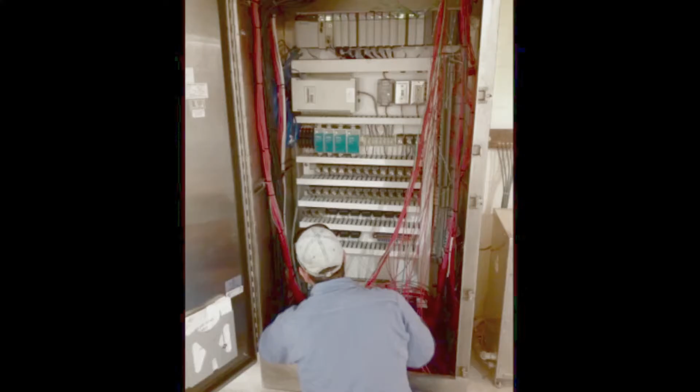It's so sandy because I bought it as a foreclosure, and it's been sitting for years with no working sprinkler system. Since I started the EPT program and began working part-time, I haven't had any time to fix it. I work for Palm Beach County Water Utilities, out by Boynton Beach Boulevard and the Turnpike. I intern as an instrumentation technician. Here I was introduced to programmable logic controllers.

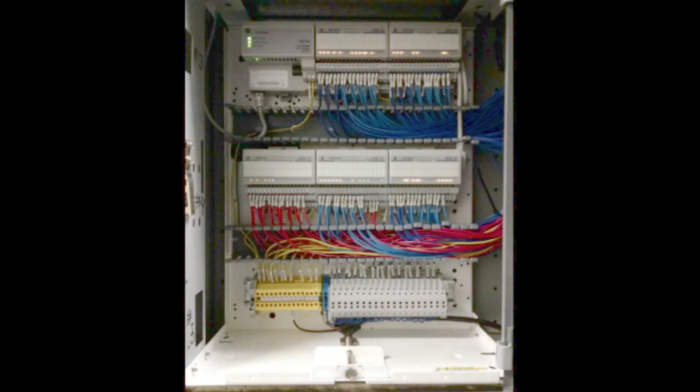They are basically industrially hardened computers that use dozens of inputs and output signals to control a final process, in our case, reclaimed water. I have had a share in many projects like wiring this I/O panel, and I have recently been tasked with completely updating this mess of a cabinet. Months and months of tedious work.

Working here is why I've decided to incorporate a PLC in my Capstone project. Wiring and programming one on my own would sharpen my skills in this field, meanwhile solving my cat problem. I would have to use the skills I learned in electric circuits, instrumentation, and programmable logic controllers. Also, I would need some knowledge about the enemy. My extensive research has taught me that cats don't like to be wet, but with what solution? Of course.

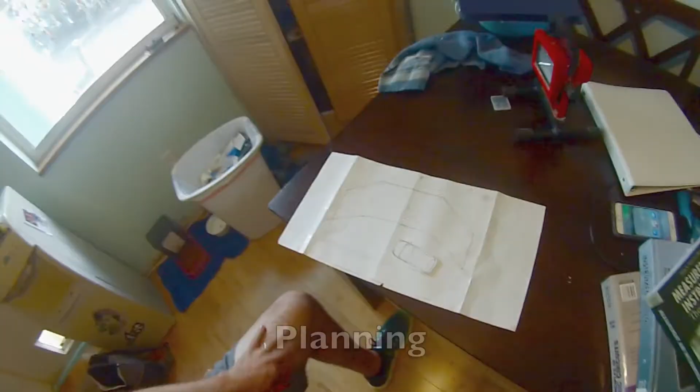It was necessary to plan carefully. I didn't want my project to conflict with any future plans of re-landscaping. At present, I have an oddly shaped piece of lawn and a crescent-shaped driveway up front. I plan on tearing up most of that driveway up front, making the lawn extend forward, but narrowing. I tested a few sprinkler types for approximate circumference at standard city water pressure, and I settled on 5 overlapping locations.

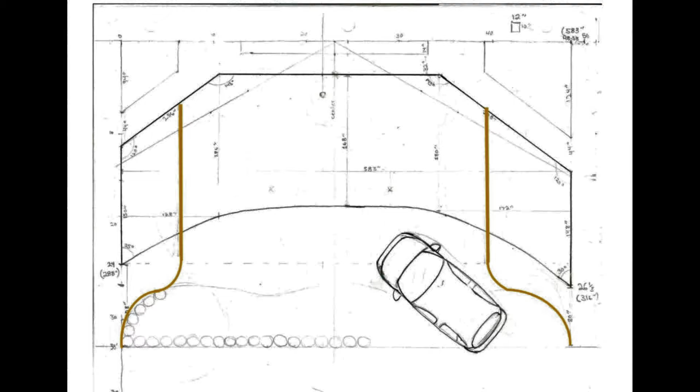My water source was conveniently located nearby, and to keep pressure up, I situated the valves nearby the sprinklers. I ran the supply water underneath the entranceway, and then out to my field and perimeter sprinklers. I added a small containment well to keep the pressure up, and to keep the water lines charged. Next, I would have to map out the previous owner's sprinkler system. It has been out of service since I bought the house nearly a year and a half ago. But once I located it, I tied it into my main system to be used for regular lawn watering.

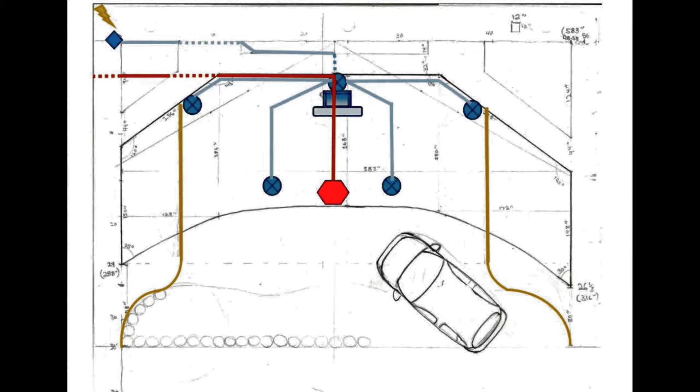The last thing to consider was my power. An old conduit line once powered a light post in my driveway. It has long since been disconnected though, so I decided to make use of it by adding an indicator light to tell me when it isn't safe to walk out into my yard. Also, a receptacle was nearby my water source, which I had planned on using to power my control panel. So I extended my conduit, and I positioned my 120-degree motion sensors. The last thing I needed to do was to install my control panel and to run my wire.

Ideally, a through-beam trip sensor like one on your garage door would be the best technology to use. Passive infrared motion sensors, or PIRs, do not work well during the day and are typically designed not to activate with small animals. However, they are cheap. Very cheap. I didn't want to run 120 volts AC in my front yard. Plus, I wanted to try to make it compatible with my 24 volt DC PLC. So with much searching, I found one that was 12 volts.

Or so I thought. After much bench testing with no results, I had to go back and reread the spec sheets, only to find that 12 volts was just a typo. I had to contact the seller, hoping that it was a mix-up and that he sent me the wrong kind of switch. He was no help at all. I'm going to have to alter my design. This was a big setback for me.

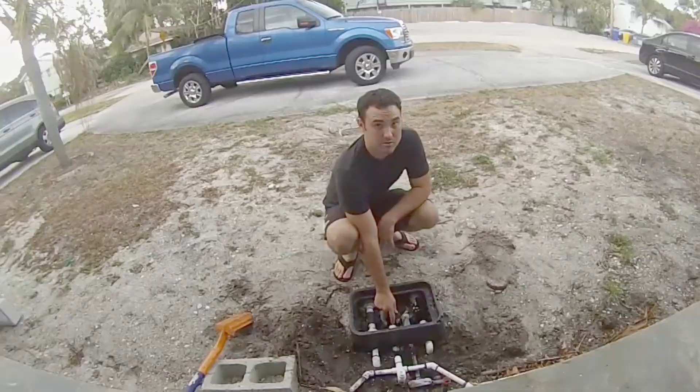Let's take a look at my valves. Here I have a solenoid valve on my house water coming in, city water. Here's a sprinkler valve going out to the field sprinklers. Here is a check valve that I have from my well water that will tie in my regular sprinklers. With the perimeter sprinklers, I wasn't getting enough pressure. As you can see, I removed this one and capped it off. And those down there I have to get rid of.

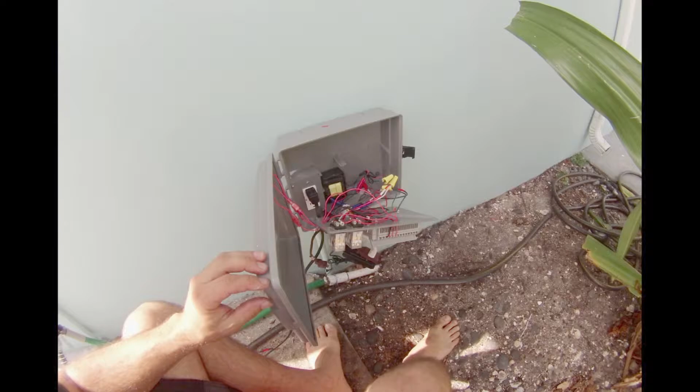My fellow student Sean helped me use a 3D printer to make this neat field light indicator. When the system is down, the cat's face turns red. I've updated my control panel 4 times. I've had many components fail on me, such as a rectifier, a switch, and a transformer that burnt up because I did not have the PLC properly fused. This is what it looks like now. I have 3 different types of power, all working in harmony. All that was left for me to do was to write a program, download it to the PLC, and to test my project.

Well, it works. In the future, I'd like to install magnetic door contacts that will shut off the system whenever I leave. Also, since cats are considered mostly nocturnal, I'd like to include a photocell that turns the system on automatically in the dusk hours. Time didn't allow me to do everything that I wanted to do, but the project in all was a success. As for the cats, they seem to be liking the neighbor's yard a lot better than mine.